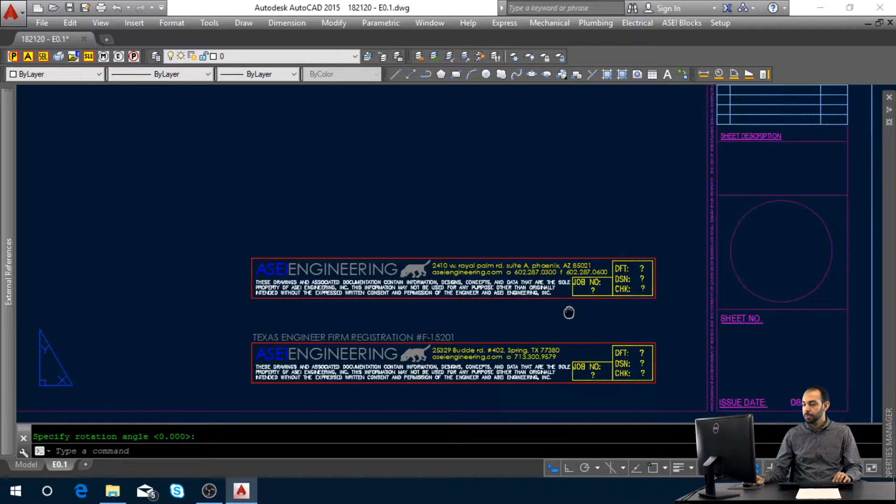Now we're going to bring in our ASEI logo. Come up here to the top, drop downs, title blocks, ASEI sheet logo. For this project, we're going to be using our non-Texas logo. Please be sure to use the one that corresponds to your project. So I'm going to place the logo 0.25 left and 0.25 upwards from this corner.

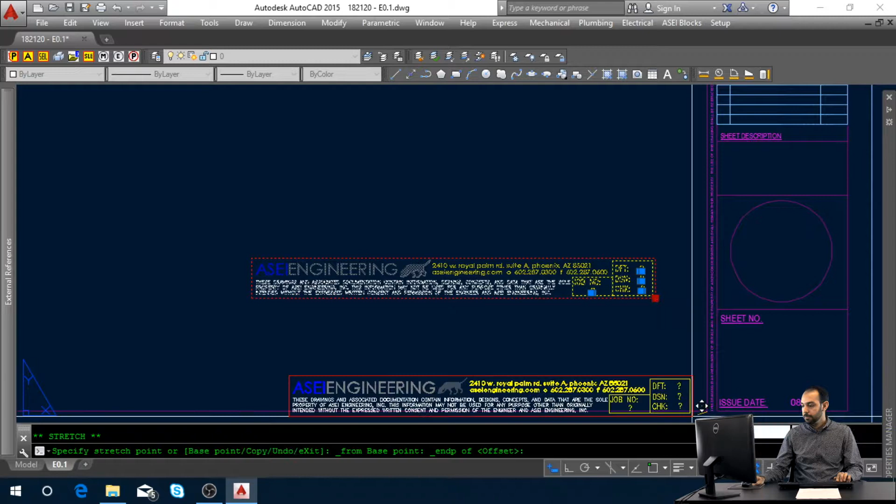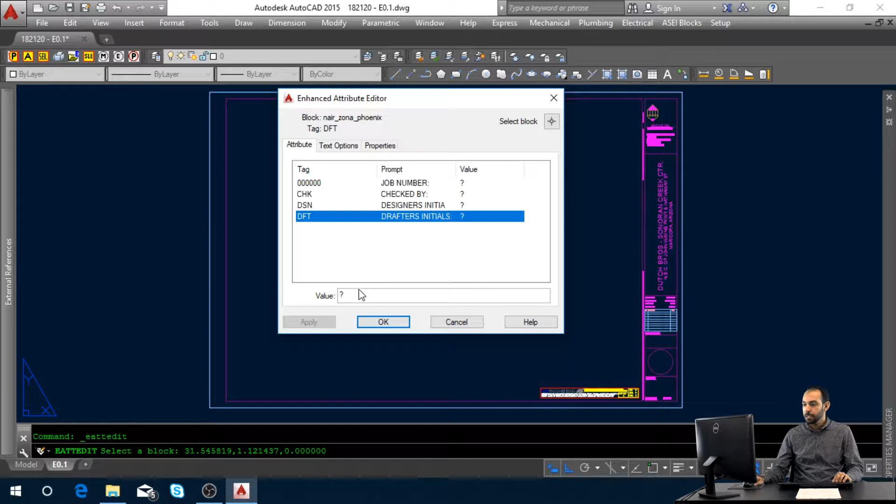Now this is going to stay here on all of your electrical sheets. It's going to be in this exact same corner. So go ahead and fill in your job number. This checked by is going to be the engineer that's reviewing your project. This is the designer that's going to be on this project that you're working with. And this is the drafter's initials, so you can put your initials there.

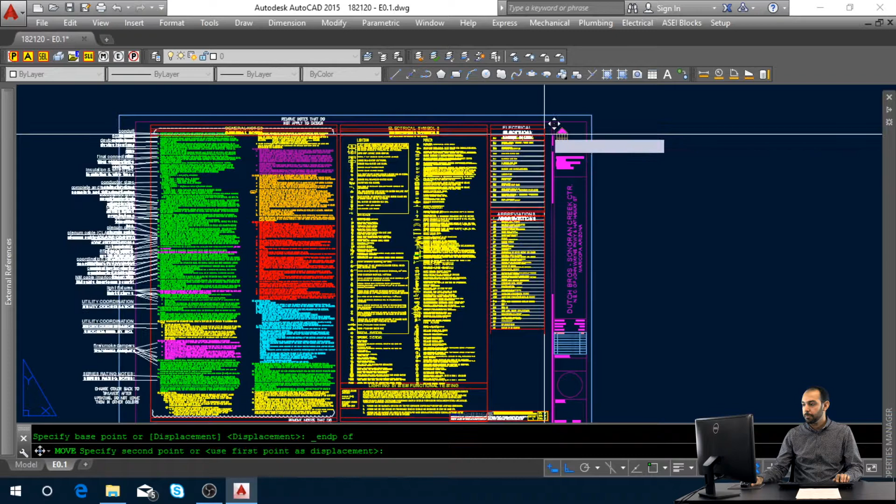For our E0.1 sheet, we want to bring in from our electrical drop down, go to Sheets, Sheet E0.1, and you want to bring this and place it somewhere on the sheet for now. It comes in as a block, so what we want to do first is line it up with our logo. So I'm going to grab this endpoint and then reference off of this corner here, and just slide it up and place it here. This way everything stays lined up and there's no weird shifting lines.

We also want to go ahead and click the block, and if you type in burst, it's going to undo the block, and now you have individual files. You have text here in white, that's in Defpoints. Go ahead and erase all of that that's in Defpoints.

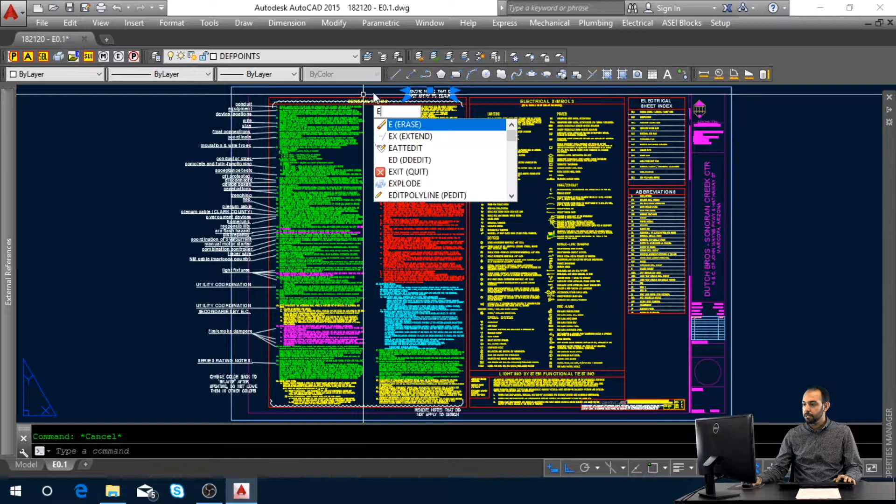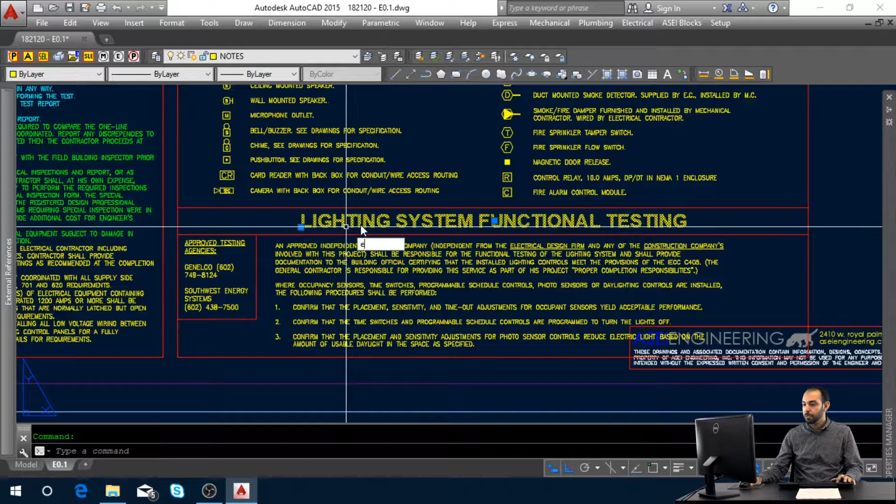These are just notes for you to look at so you know what's going on. What we're going to talk about today is specifically our sheet index and our general notes. We also have the lighting system functional test. For this, we're going to remove it for this project, and if you're not sure whether to keep it or not, please speak with your designer that you are working with on this project for clarification.

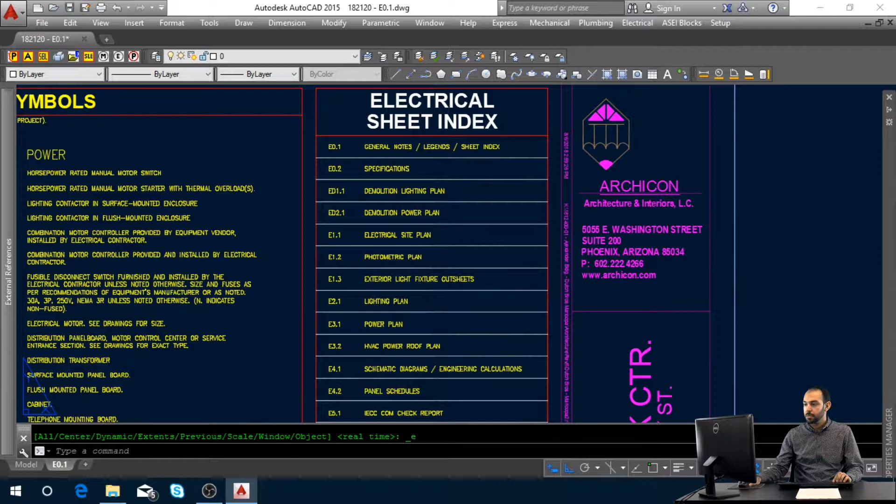I just trimmed those lines. It's good to get a good idea of what the project is and what the scope of work is. This will define which sheets you're going to use. For this project, we will not have any demolition. It's going to be a ground up project. So I'll delete those two, and I'm just going to slide these up.

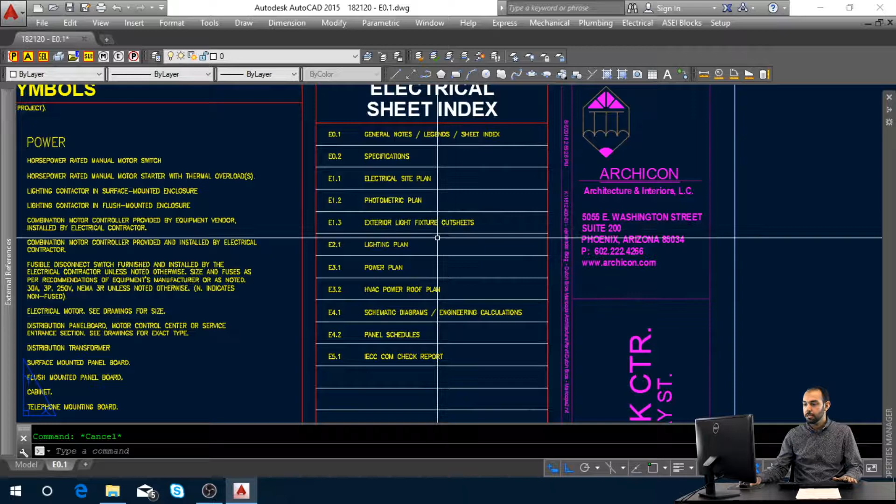Again, if you're not sure which ones to delete or adjust, leave it for now and speak with your designer and they will help you. And last, we'll have this section here. It's multicolored to help you differentiate between the sections that are spoken of in these notes. For now, we're just going to leave it here.

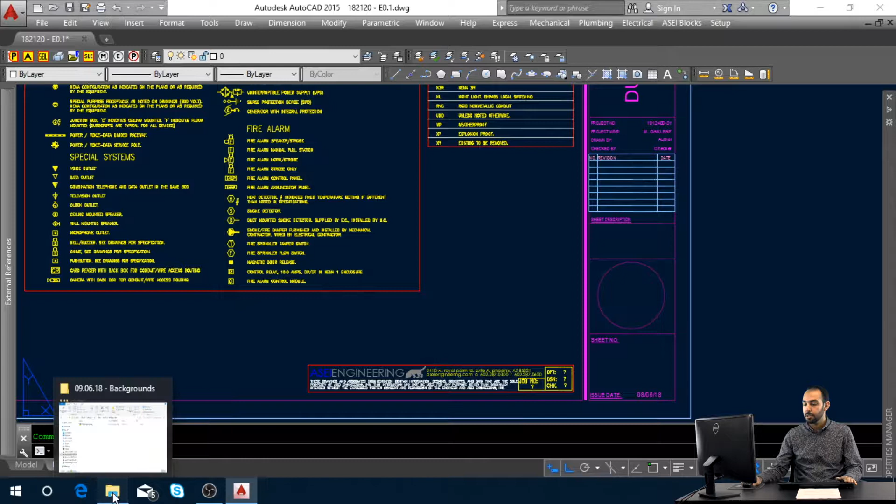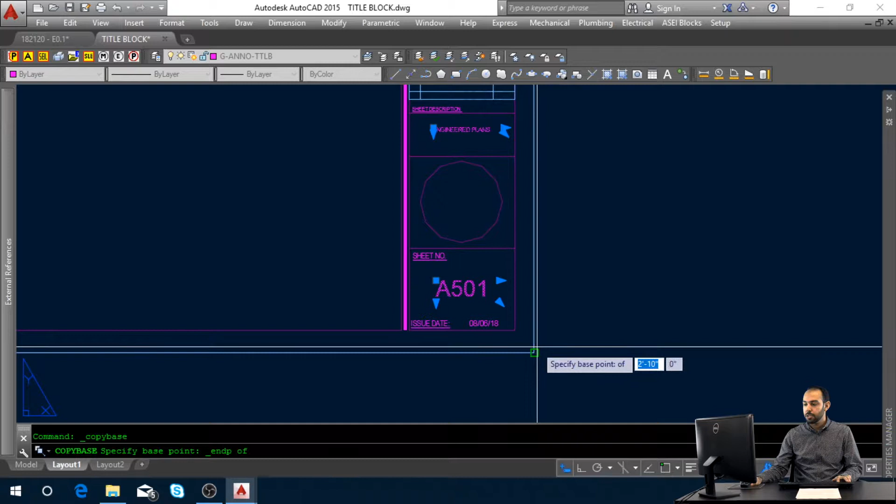Now, if you notice, we need a sheet description and a sheet number to label. So I'm going to go to our job folder. In our A folder of your project, go ahead and open up where you have your title block that the architect sent you. You want to go ahead and select the sheet number, and if you see they have a sheet description. So per architect, this will change slightly in locations, so just please grab it per architect that you're working with.

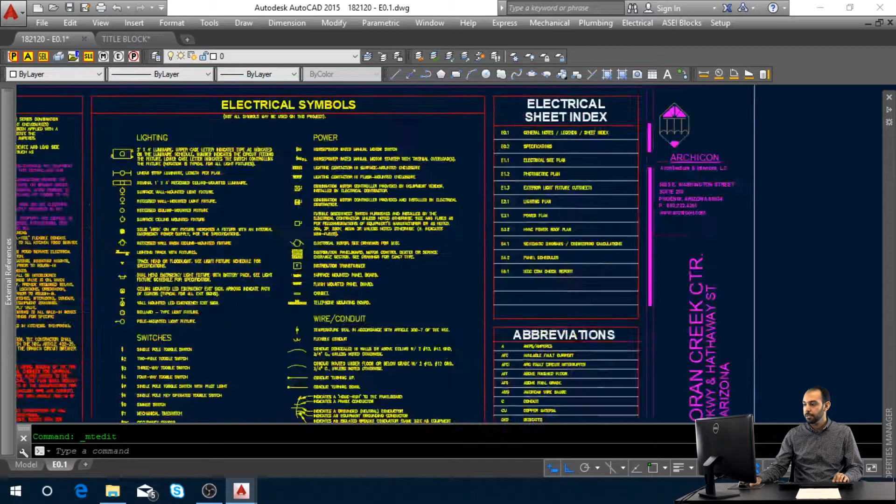And I'm just going to bring it into our sheet, and I'm going to rename it E0.1. And for the sheet name, I'm going to come over here to our sheet index. Here it tells you what sheet you're on and what each sheet name should be. So if you ever have any confusion on what to name the sheet, you can look at the sheet index. I'm going to copy this, come back to our sheet description, and just paste that there. So here you go. Here is our electrical sheet setup for E0.1.

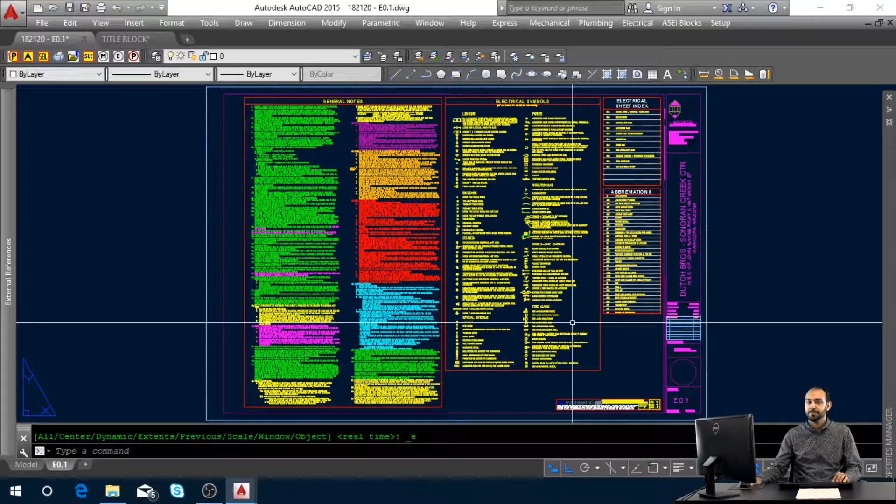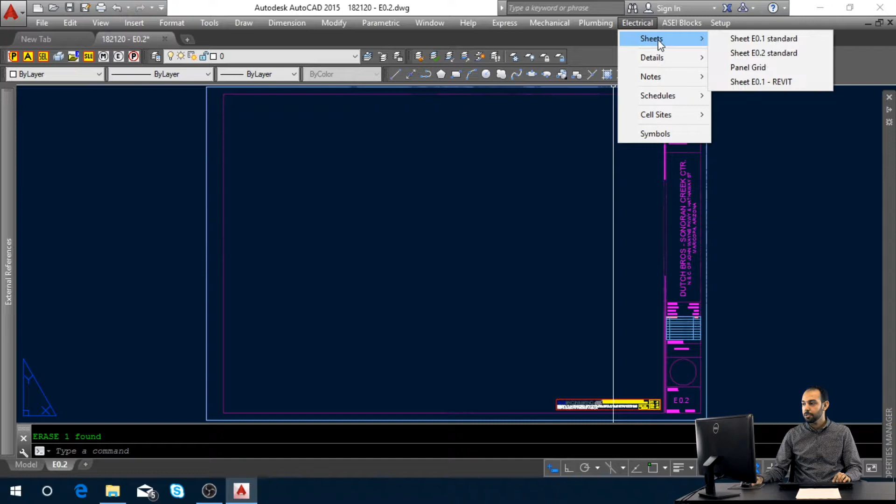So we're going to move on to our E0.2 sheet. We already brought in the title block, our logos, everything's in. We want to go ahead now, and this is for our specifications. So we'll go to electrical at the top in the drop down, go to sheets, E0.2. Now I'm going to click this off to the side for now.

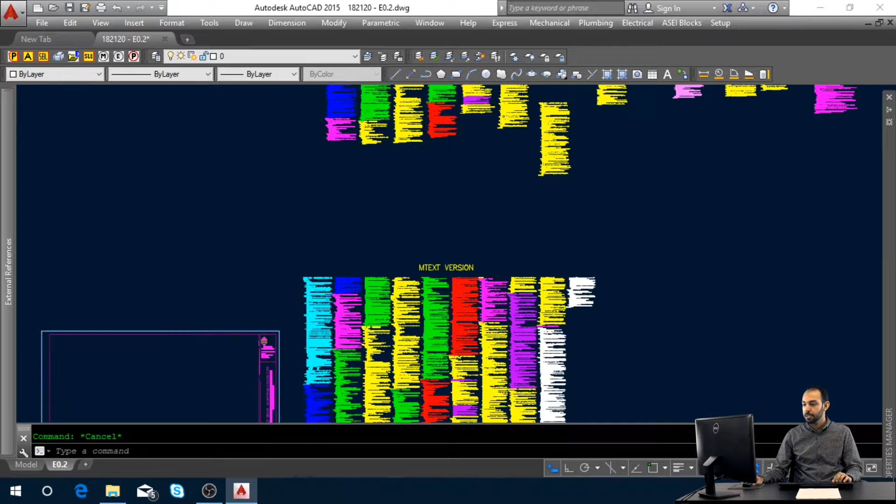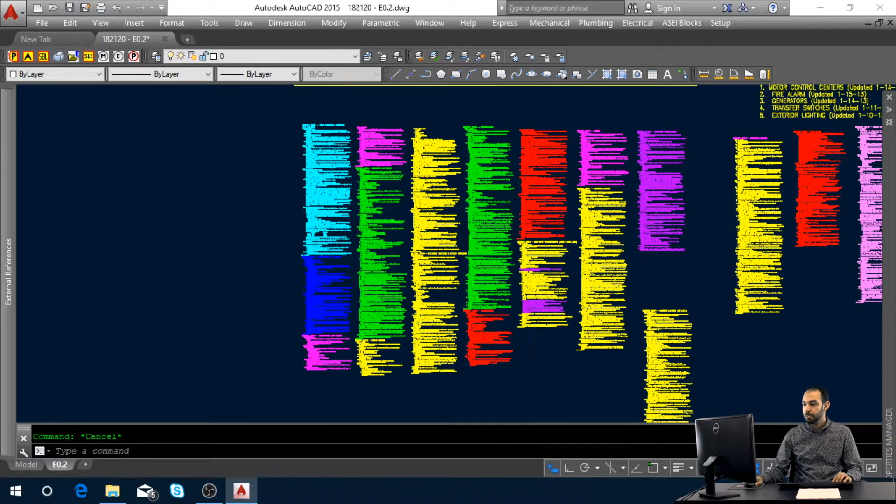So what we have here is our specifications that we use for our company, specifications to the contractor. So we have two options here: a mtext version, and then we have dtext for direct text, which is manual sentences, so everything is separated into its own line. For this project, we're going to work with the mtext.

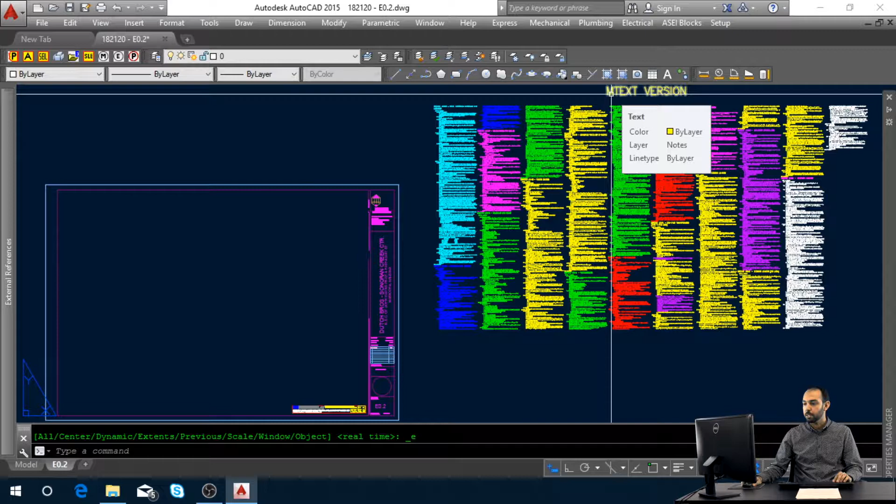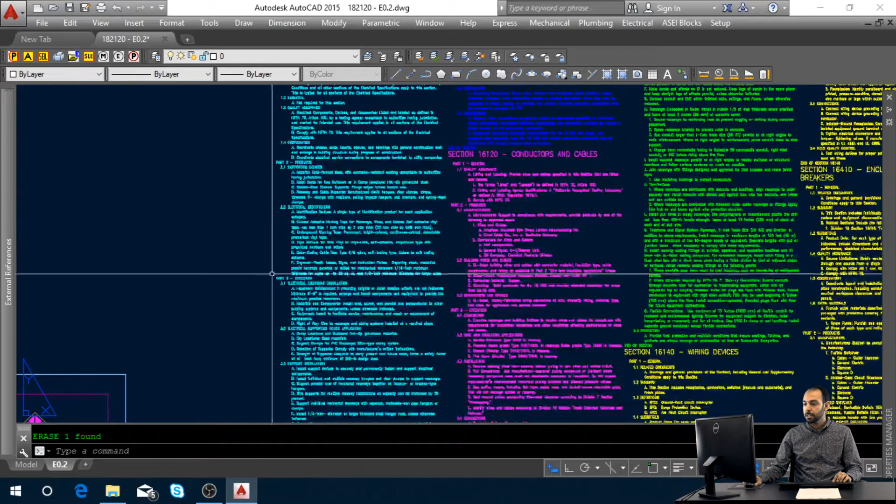Now when you're setting up the projects in regards to the E0.2 sheet, you do not want to copy the AutoCAD file from your E0.1 and reuse it for this sheet. When you do that, the mtext will come in and nothing will be aligned, and all of your items here will be unorganized. So you have to be sure you create a brand new sheet that is straight from AutoCAD. You do not want to copy over anything for this specific sheet.

So I'm going to go ahead and grab it. We're going to move it into our title block. For now, I'm going to place it somewhere where it fits inside. We're going to have to edit this. If you're not sure how to edit these, you can leave it and have your designer help you with clarifying which sections need to go.

Again, we have a multicolored text. This is to help you differentiate between these sections. So we have too much here, it's fitting off of our title block. So what we're going to do is split this between two different sheets.

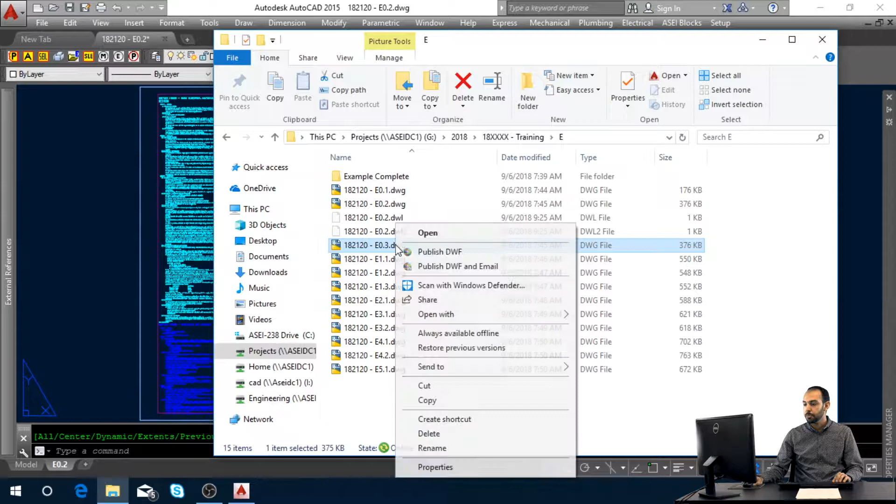So I'm going to go ahead and open up or create a brand new E0.3 sheet. We're going to name it as 0.3. Just jump over to E0.3. And what I'm going to do now is go back here to our E0.2. I'm going to copy with a reference point and bring it over, and I want to place it in the exact same spot.

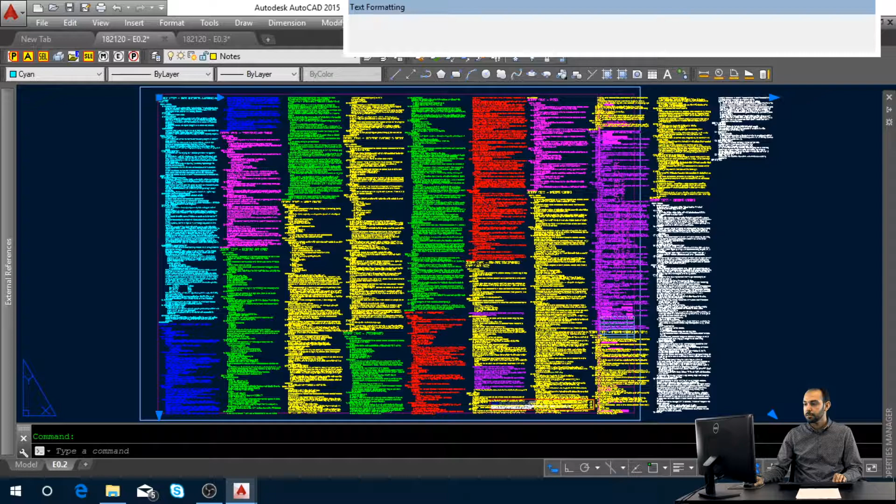So because these sheets were created brand new, when I copied over the text, it stayed aligned. So that can be done. I'm going to go back to E0.2, double click into the mtext, then zoom out a little bit.

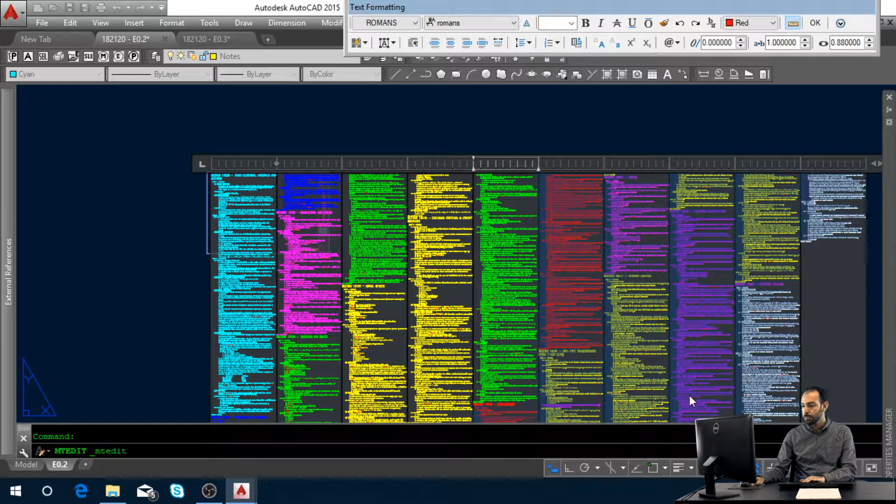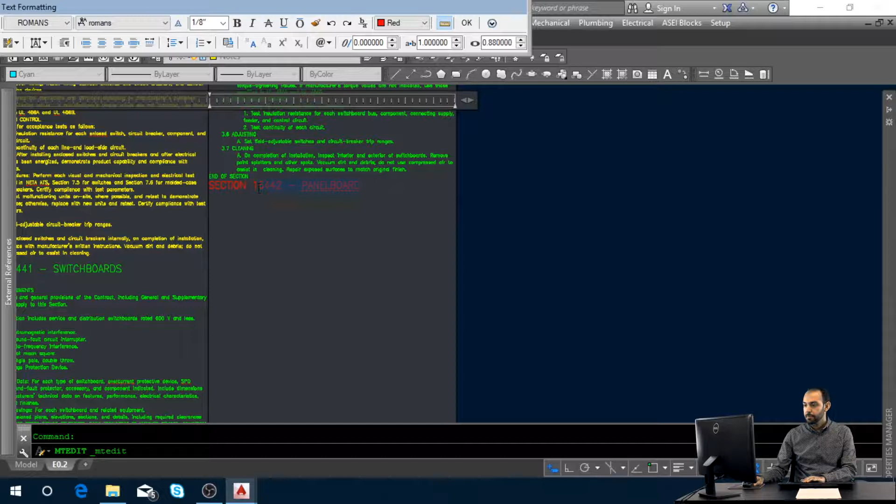And I'm going to get rid of from the red text for here, and we're going to just backspace. And you want to get rid of this last portion here. Now I have a much smaller text to work with. I'm going to slide it over.

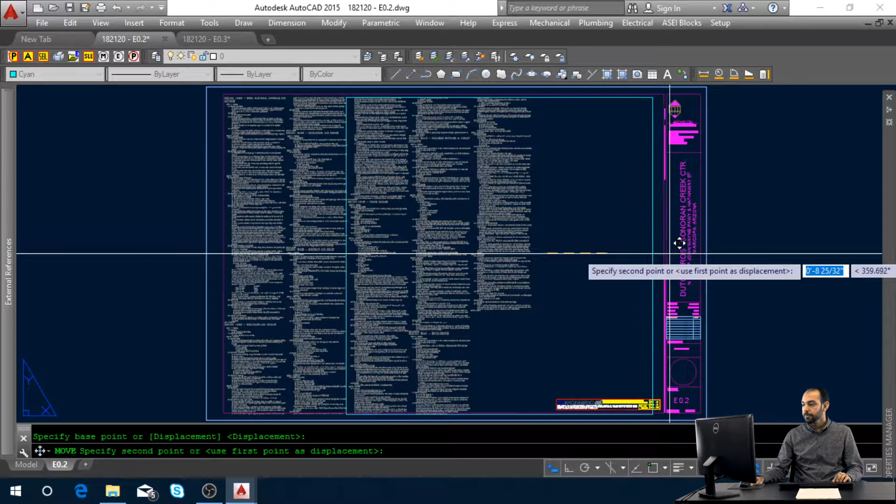And you want to also click on it and move it up so it's not overlapping on your ASEI logo. So I'm going to slide the line above. So now we have what looks like this. And so we'll go to our E0.3 sheet, and everything from that red going forward, we were going to delete that section since we already showed it on our E0.2 sheet.

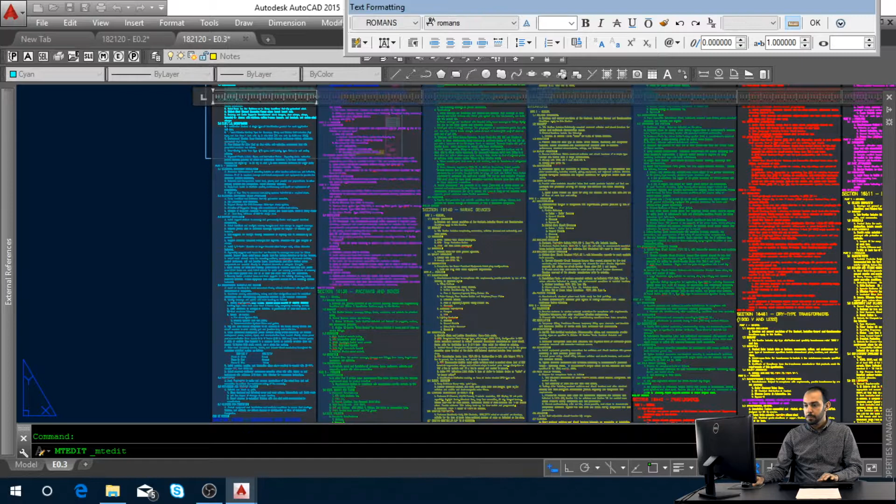So make sure you highlight everything that's in there. And you want to just get rid of all of this other portion.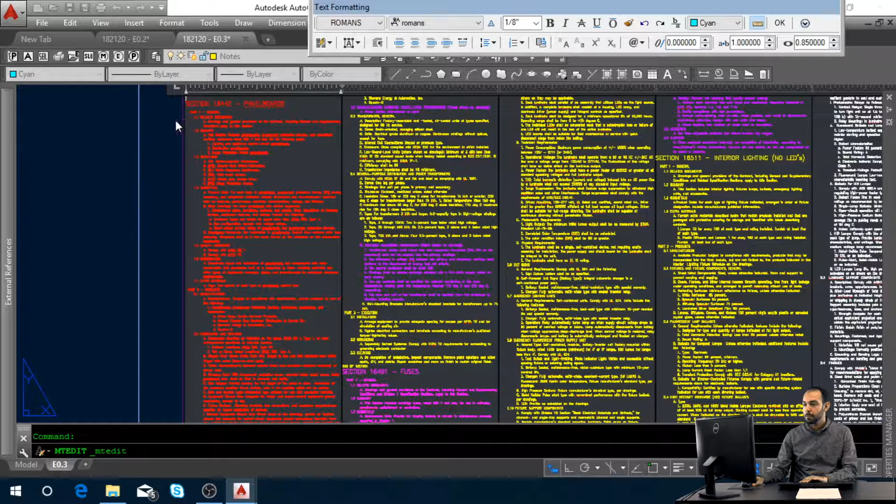Okay, so we're going to slide it over to our right. The reason you want to slide this over to the right and not leave it on the left side of the sheet is because when we submit these sheets to the architect and they print them out, they bind them together, and the binding is on our left side. So we don't want text to be too close over here in case that when they're flipping through the sheets, they don't see the text. So we try to move it over to our right side of the sheet.

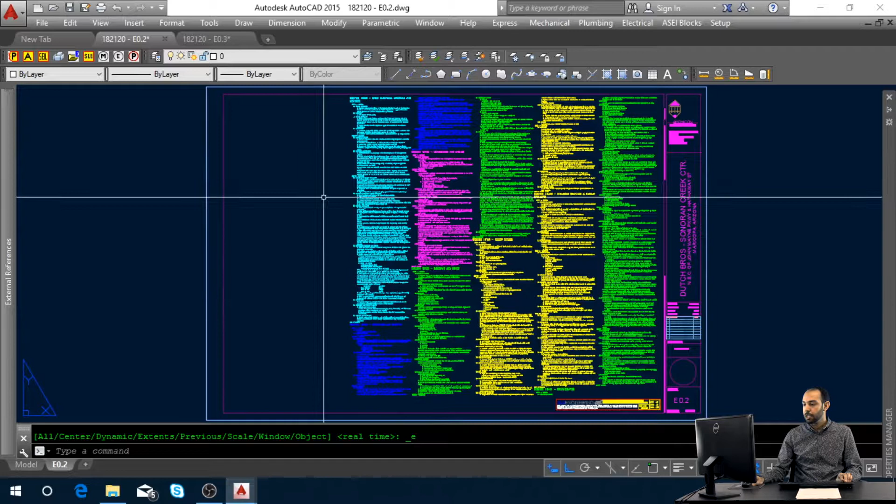So here we go. You can leave it multicolored for now, and when you speak with your designer, you can go over which ones to remove and change it all to yellow when you're done for both of these.

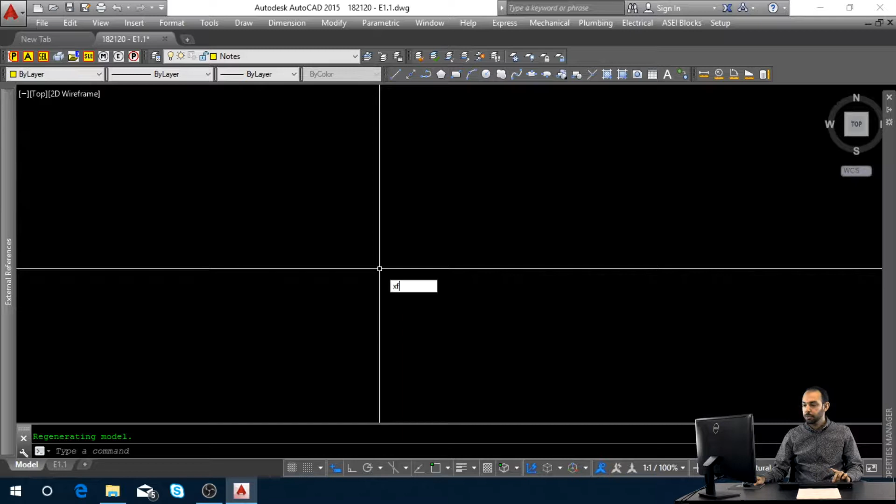So let's move on to our E1.1 sheet for our electrical site plan. Let's go ahead and jump into our model space, and we're going to XREF in our site. Select your site. Make sure it comes in at 1:1. So here we have our site that we're working on.

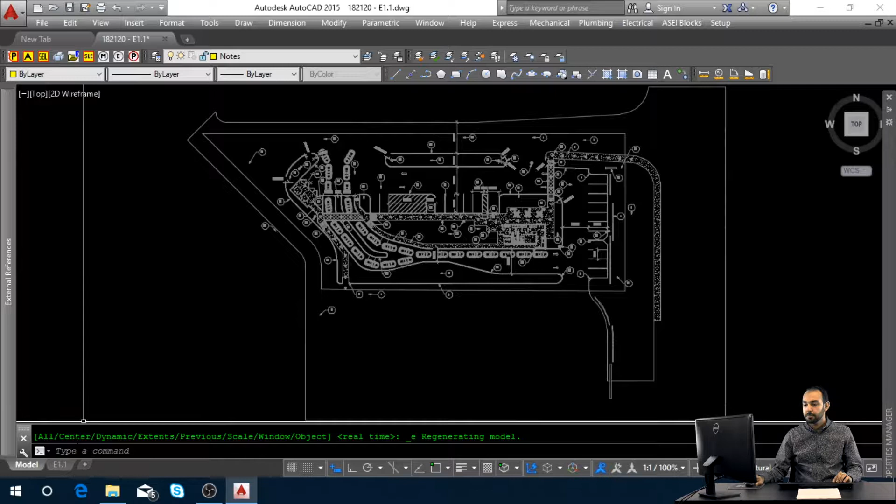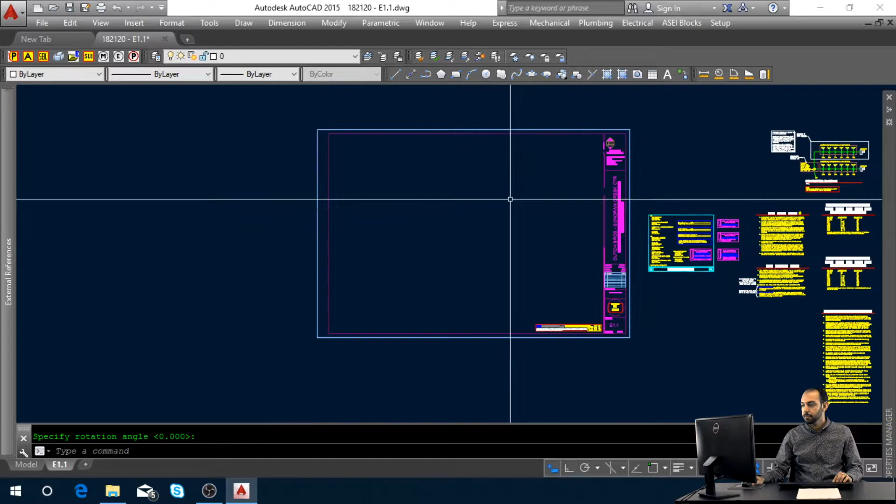Let's go ahead and go back to Paperspace. What we want to do is go to our electrical drop down, and this time we want to come down to our notes. We have a section called Site Plan Notes. Go ahead and bring that in, place that on the side of your title block. This will come in as a block, so go ahead and just burst the block so you can access individually the items.

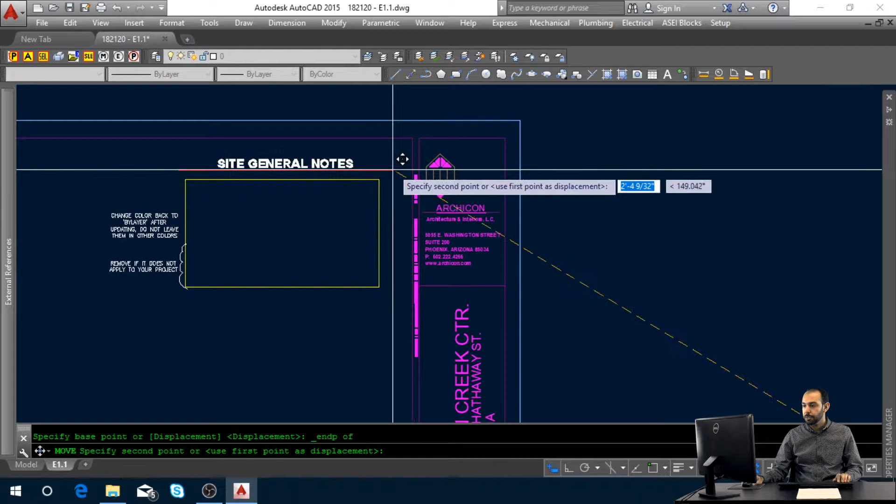And we're going to grab two items here: our site general notes and our site key notes. These two are going to be very important where you place them at first. So I'm going to place it here, and I'm going to grab my site key notes, and I'm going to move it, and I want this to align perfectly with my site general notes. So I'm going to bring it from this corner and slide it down here. These two are going to match every single other E sheet where you're going to use them.

You may want to make sure that these are the exact same locations. This one might change a little up and down, but they're going to be in this area. So that's going to be on every sheet.

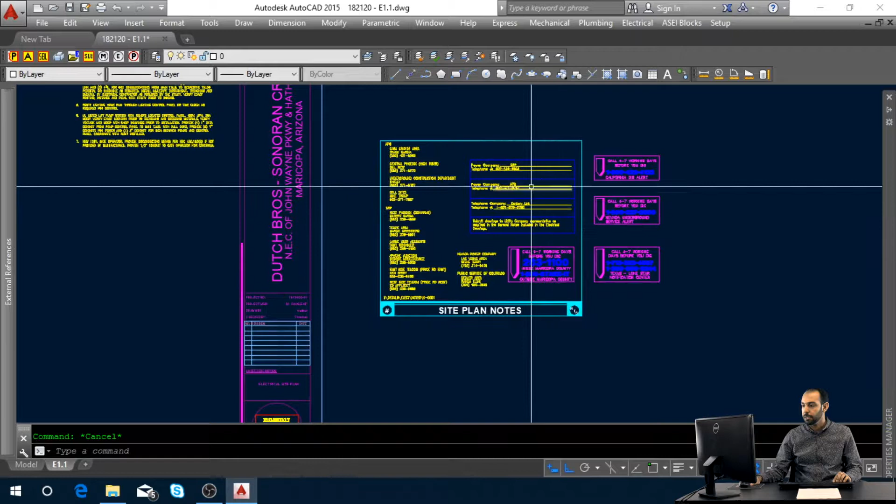Next, we want to bring in our utility note, this blue box here. The purpose of this is to let the reviewers know who the utility company is. I'm going to bring this in and line it up to the corner of my logo, and move it up 0.25. You can leave that there for now.

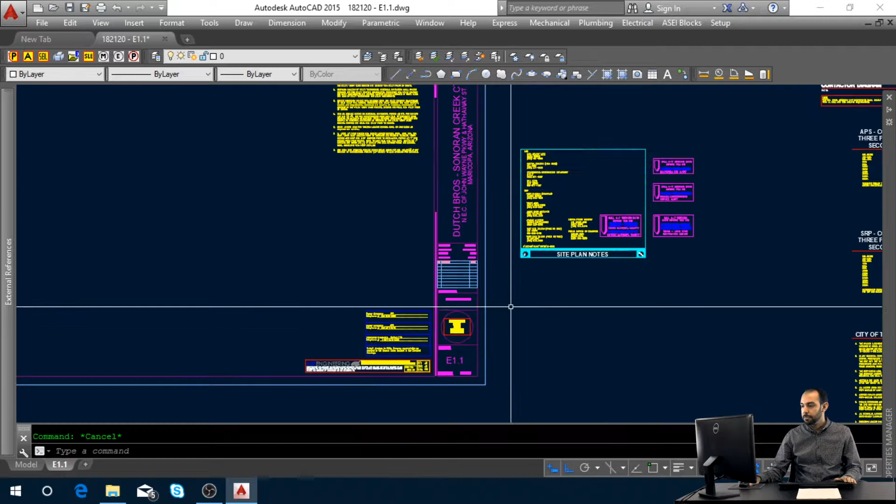Depending on the city that you're in, you want to go ahead and select your dig note. This lets the contractors call to make sure there's nothing underground. So I'm going to move that over from the corner of our utility note, again 0.25, so everything lines up and looks neat.

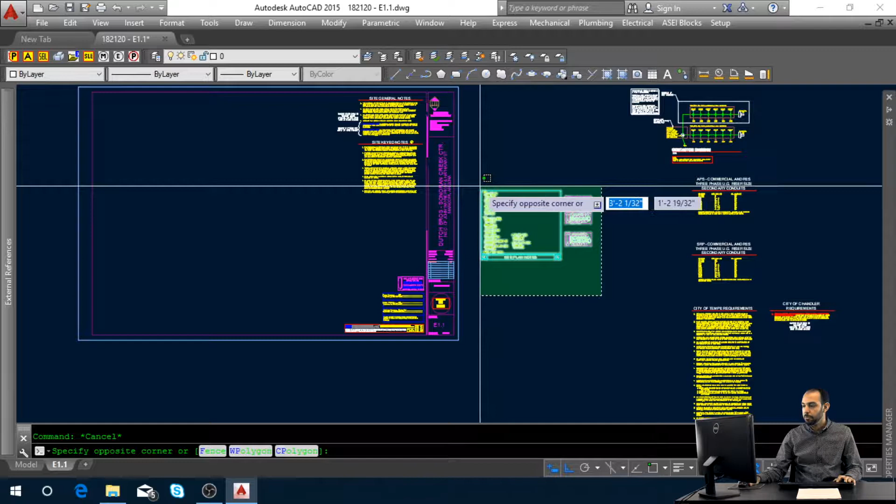You can go ahead and remove what's left of your utility note. If you're not sure which one to pick, go ahead and speak with your designer on that. Depending on the location of your project, these notes are here for your reference. Since we're not in these sections, we're going to just remove those, and I'll go ahead and remove these other ones. Again, if you're not sure, you can leave that on the side of your sheet.

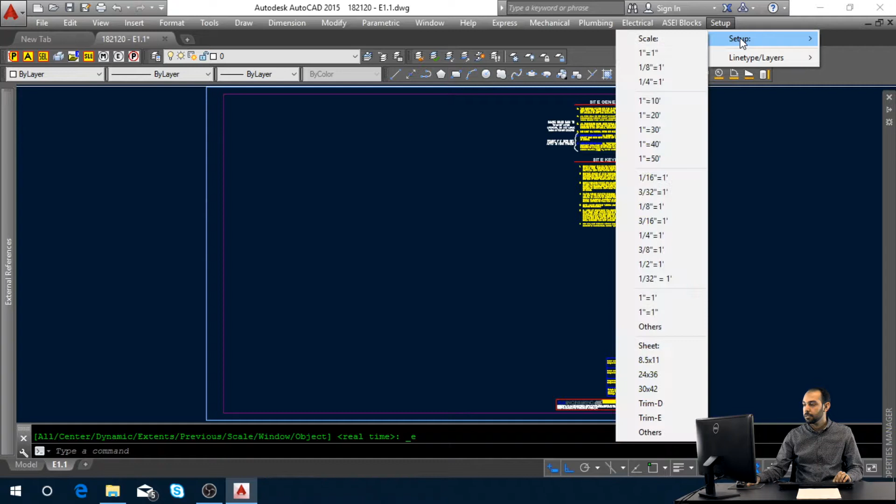So next, I want to go ahead and bring in my viewport so we can see the site. I'm going to bring in, up here at setup, certain layers. I want to bring in general.

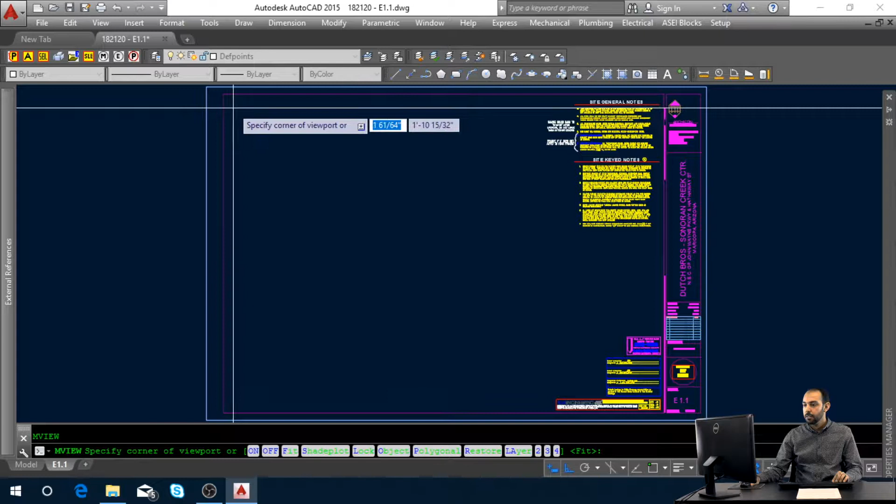And so you should have a Defpoints layer. You want to be on that layer. Make sure you're on that layer. Let's MV for multi-view. Go ahead and click, and then click. So you have your site.

When you go in, make sure you select your scale. The scale you want to use is dependent on the scale the architect is using. So I went ahead and typed in our scale, and that's going to be the one that matches the architect. If you're not clear, you can look in your A folder.

There should be a PDF from the architect showing which one. So I want to bring in a plan title. I'm going to go into the ASEI blocks, go to blocks. You want to bring in a new plan title with the north arrow. Select that, bring that in, center it to your viewport.

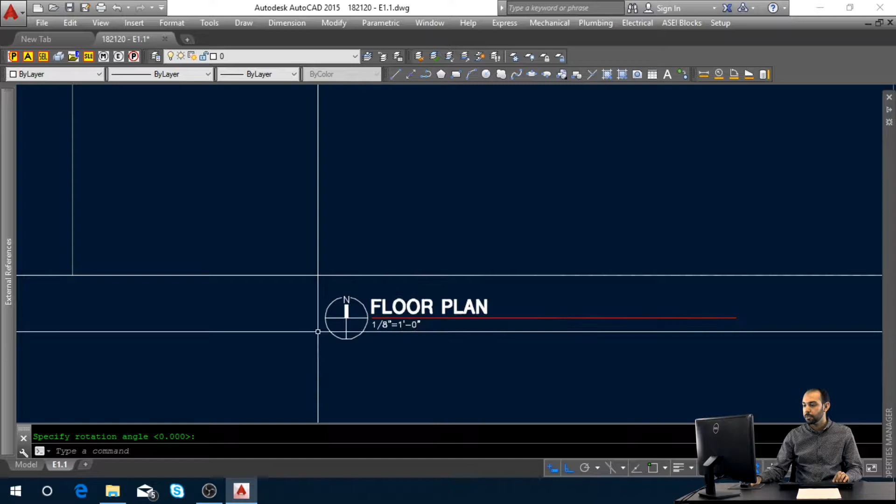You want to verify your north arrow. You can look at Google Maps, look at the address, and see the rotation of your building to make sure that it's facing north.

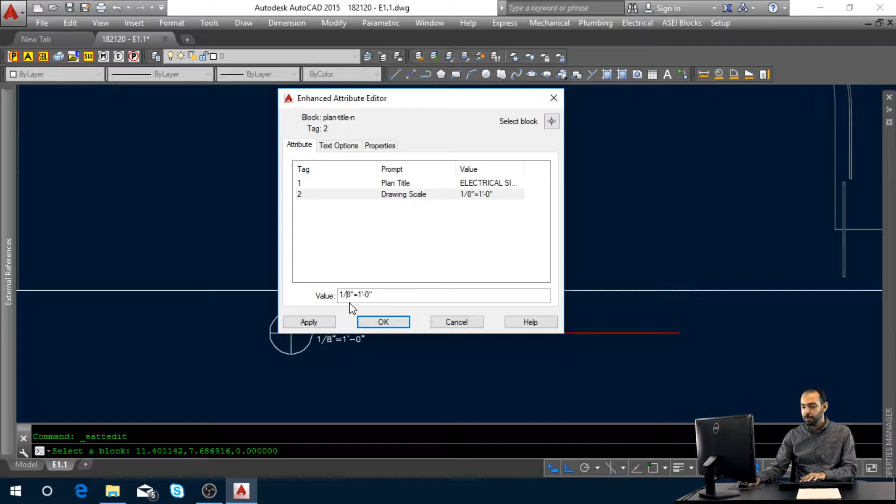Now we're going to name our sheet. This is our electrical site plan. Make sure all your text is in caps. Your scale, again, you can verify on the architect sheets. This one is going to be 1:20.

And so I have this here. A few more items before we edit the background. We're going to go into our electrical again, go down to details. You can bring in a pole mounted fixtures. You'll have these schedules, details come down. You want to look at them.

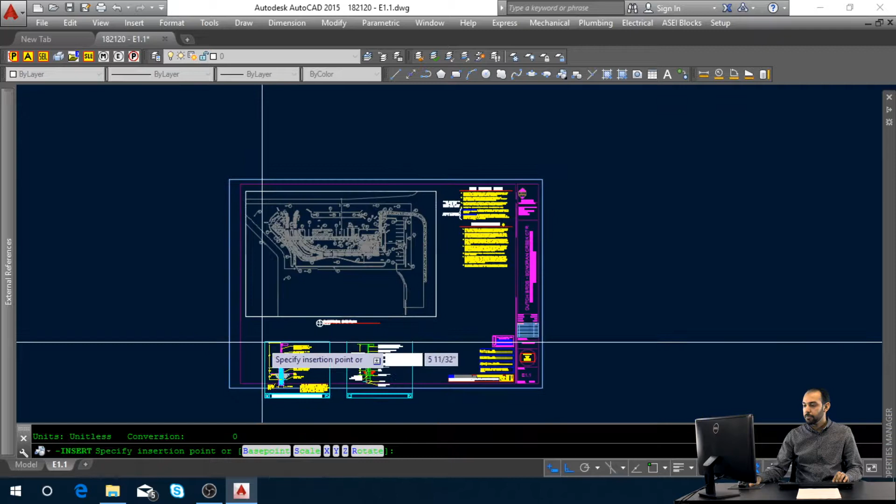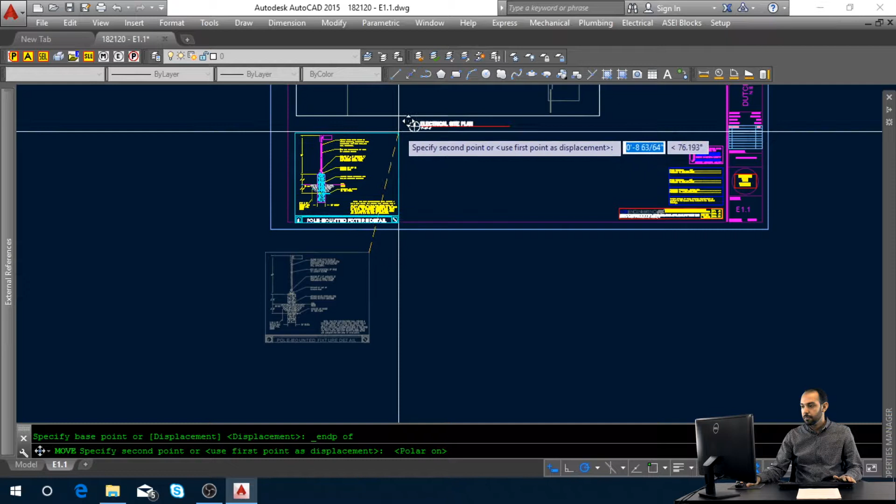They come in as a block, so go ahead and burst it. For this one, I'm going to use our purple or magenta, and you want to place that over here.

Another one is a detail for a trench. This is where the utility is going to be trenching in. We want to show a detail for that. It comes in as a block, so go ahead and burst it.

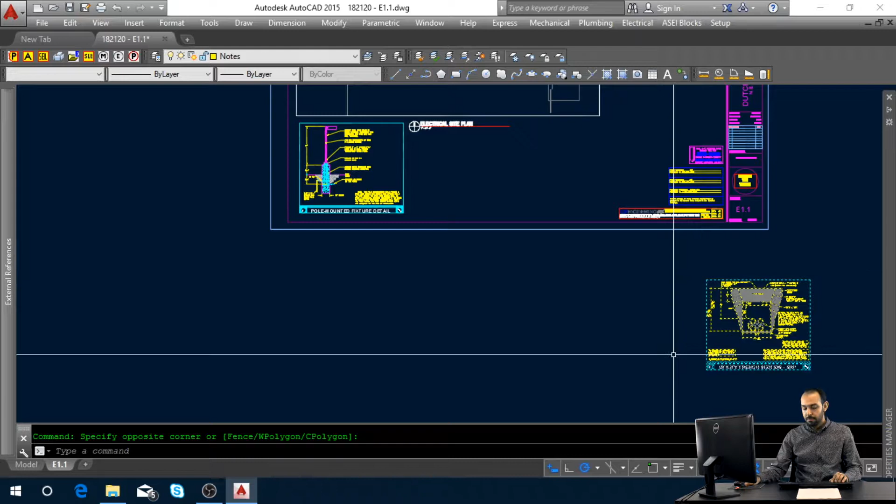You're going to want to see who your utility company is, so we have different details. For this one, it will be with SRP. I'm going to move it from this corner and line it up with my other detail, moving it over 0.25 again.

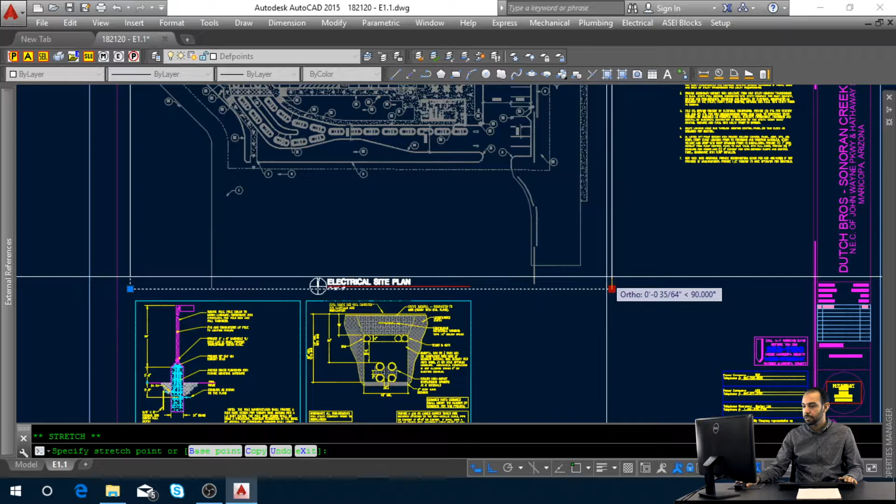I'm going to slide my plan title up, and I can pull in my viewport just a little bit over so it's not overlapping. You want to line up your details to your logo so everything's lined up.

So this should be on your paper space. You should look at this for now, it should look about this. Let's go to model space, we're going to make a few edits here.

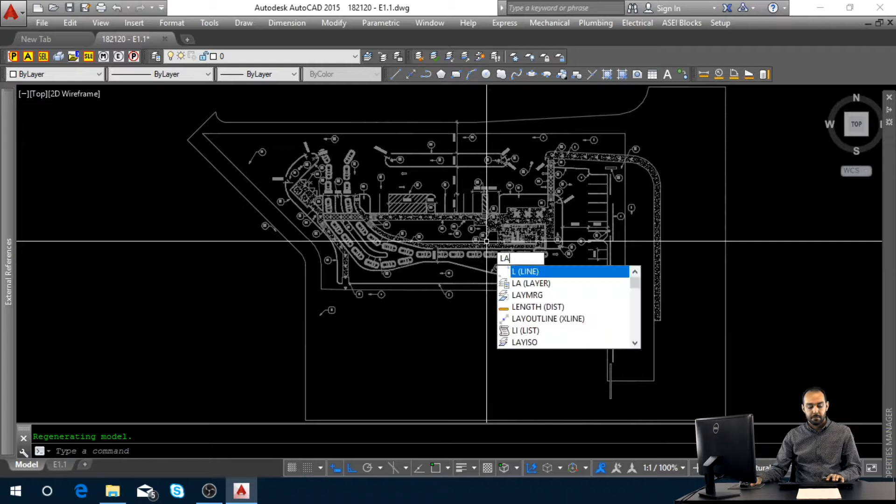So you want to be sure to get rid of dimensions that the architect sends over in the background. You can just freeze that. We'll freeze these tags. And so we have this right here.

So we have our site, there's parking lots, our building is over here, there's seating here. This reference for the cars, that's your driveway. So we're going to leave it like this for now. And so here we go. This is our sheet setup for E 1.1.

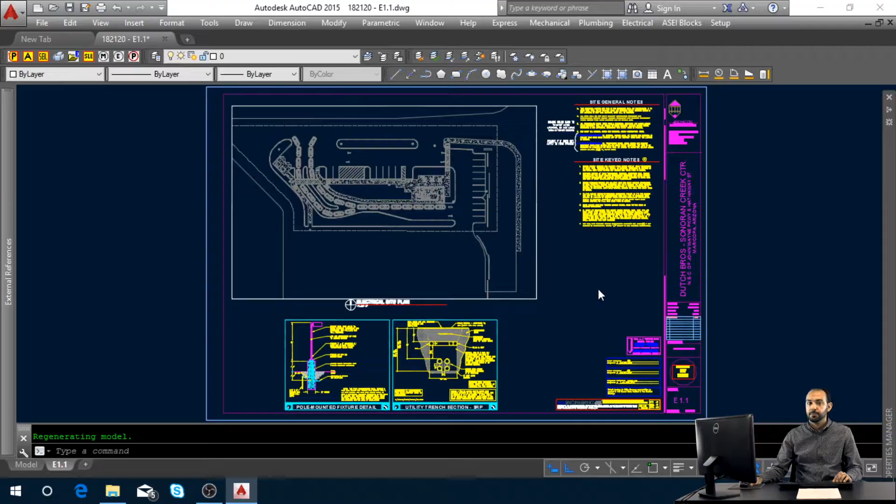Okay, so we're gonna start with our photometric plan. That's our E 1.2 sheet. So let's go to our model space.

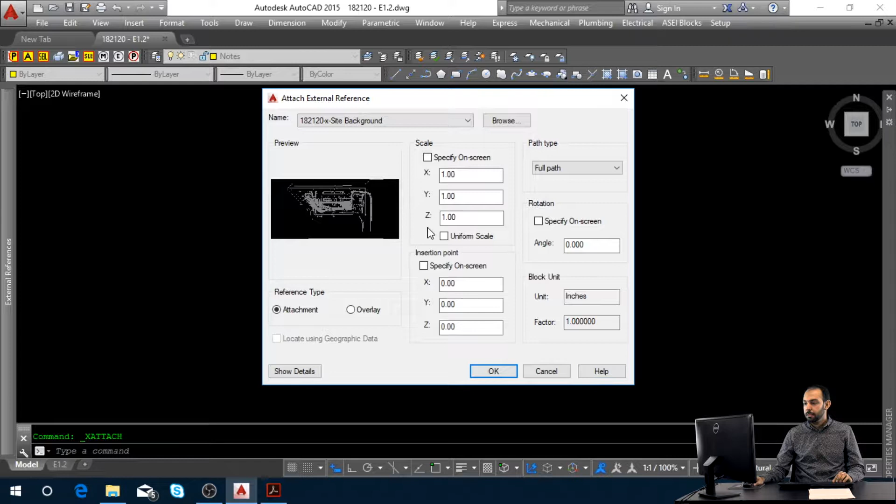And we're going to xref in our site plan, and you want to use the same one you used for your electrical site plan. Make sure your scales are at 1:1. Hit OK.

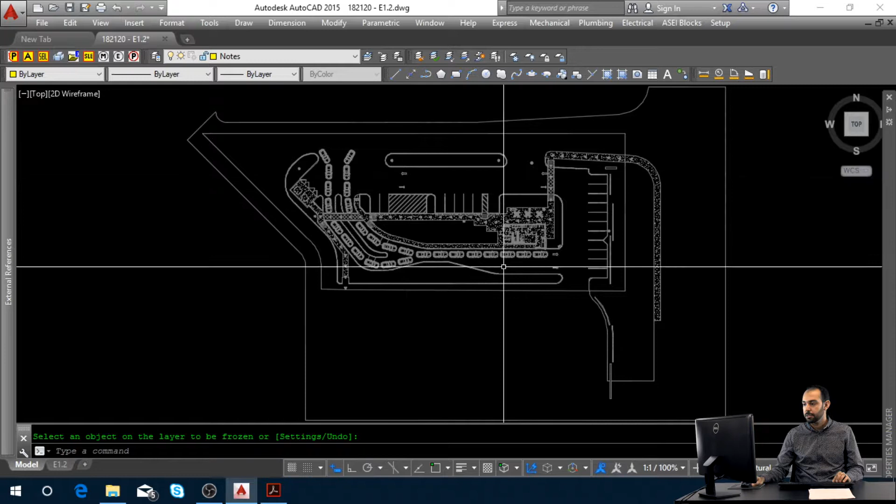And I'm going to zoom extents, and this is asking if you want to regen. Let's hit OK. And you want to freeze the same layers you froze for your electrical site plan. Dimension going to go, keynotes are there, going to go, the little tags.

And now we're going to go back to our paper space. You want to be sure you're on your Defpoints layer. And now we're going to create our viewport.

So I'm making my viewport here. It's going to ask me if I want to auto regen. You want to hit OK. If you hit cancel, it won't regen.

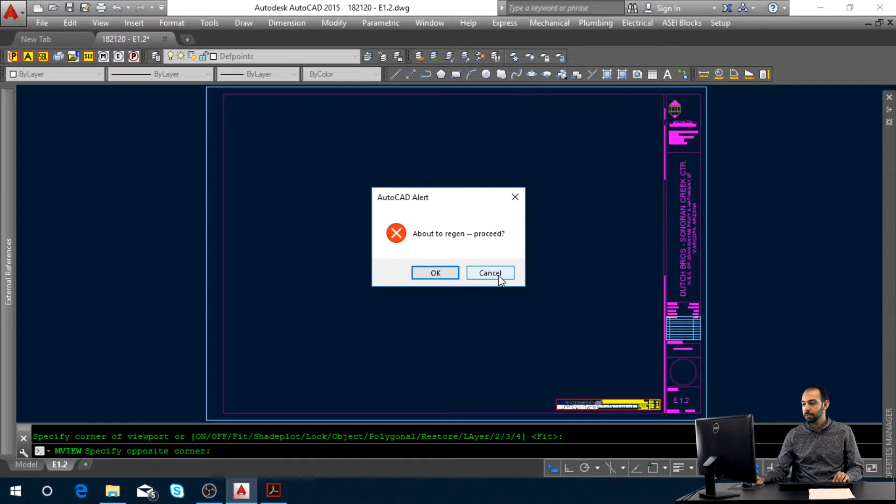And if you double click in it, it won't let you go into your viewport into model space. So let's try that again. This time we're going to hit the OK for auto regen.

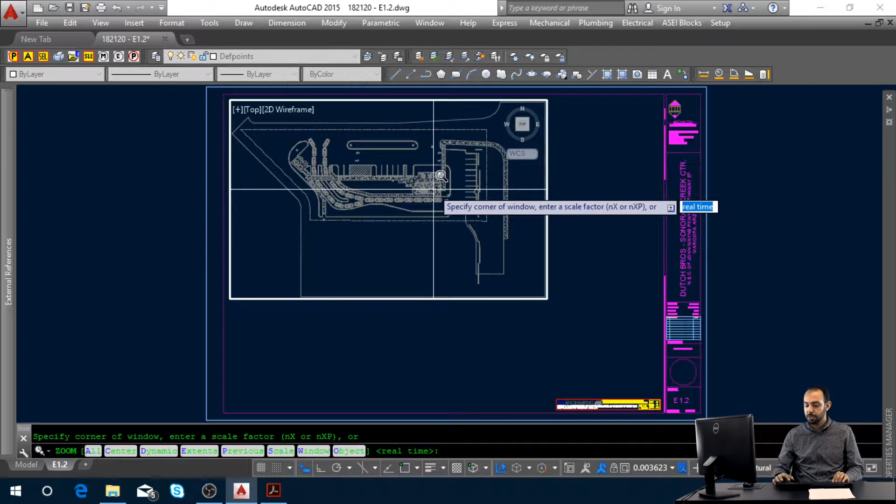So now our viewport works. Everything came in. Let's double click into viewport. You want to make sure your scale is the same as your site plan.

We're going to go to our ASEI blocks again, new plan title with your north arrow, bring that in. Double click. Let's change this to photometric plan. And the scale is going to be the same as your site plan.

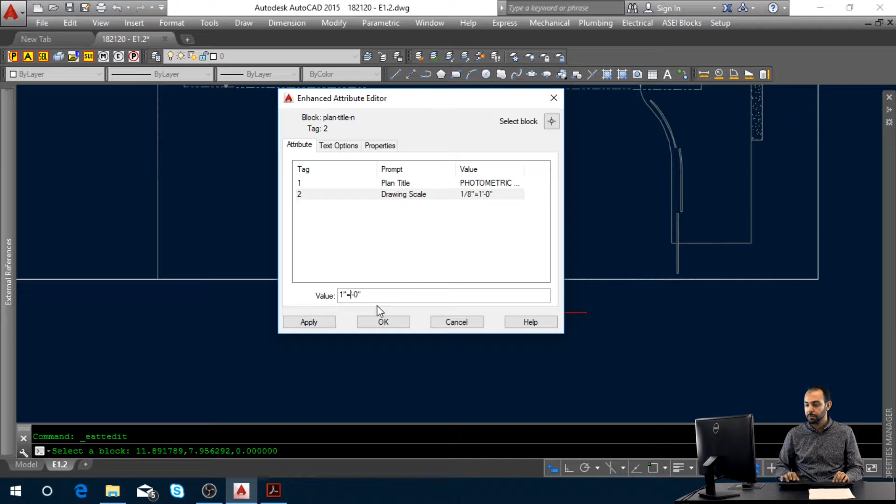So for now, you're going to leave it like this. The purpose of the photometric plan is to show the foot candles that are in your site for the light poles that are going to be there. So I'm going to show you what one looks like completed.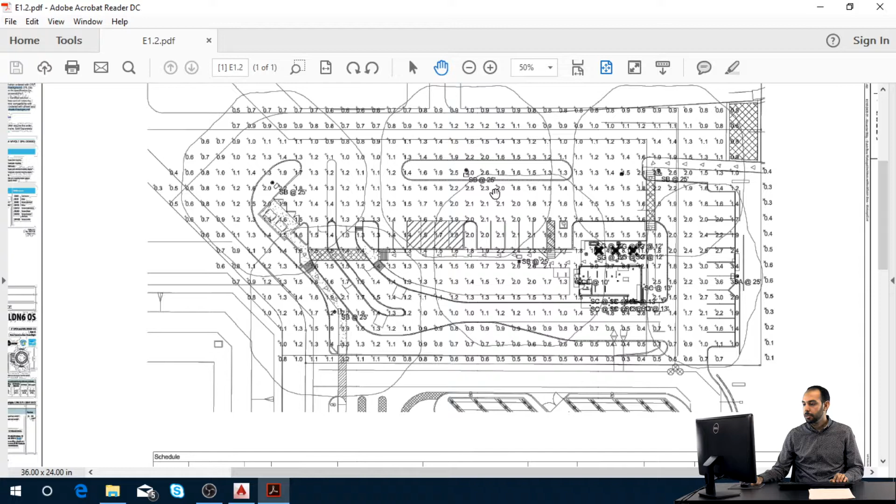These are the foot candles at every spot around the parking lot. And so they'll send this over to you. You'll reset up the sheet with this information on it.

So for now though, we're going to go ahead and leave our sheet looking like this, and your designer should be able to help you send it over to the lighting reps. And this is all you need to do for your photometric plan for the setup.

Okay, so we're going to jump over to our E 1.3 sheet, and this is for our exterior light fixture cut sheets. Now, if your project warrants to add the exterior light fixture cut sheets, you want to go ahead and create a sheet, E 1.3, and for now, we're going to leave it blank.

And what's going to happen here is the lights that you're going to be placing outside, you're going to want to show those cut sheets on here.

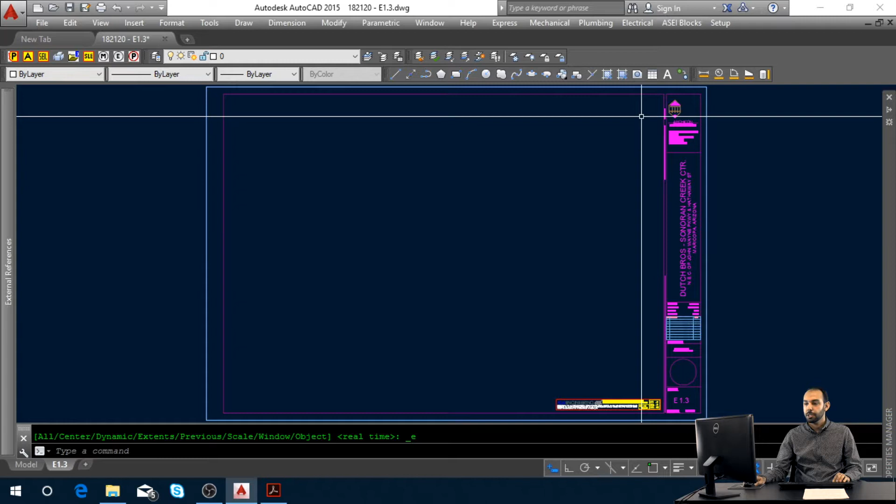And I can show you what one looks like when it's completed. And so what we will do is bring in your PDFs of the light fixtures, and you're going to drop them in, line them up like so.

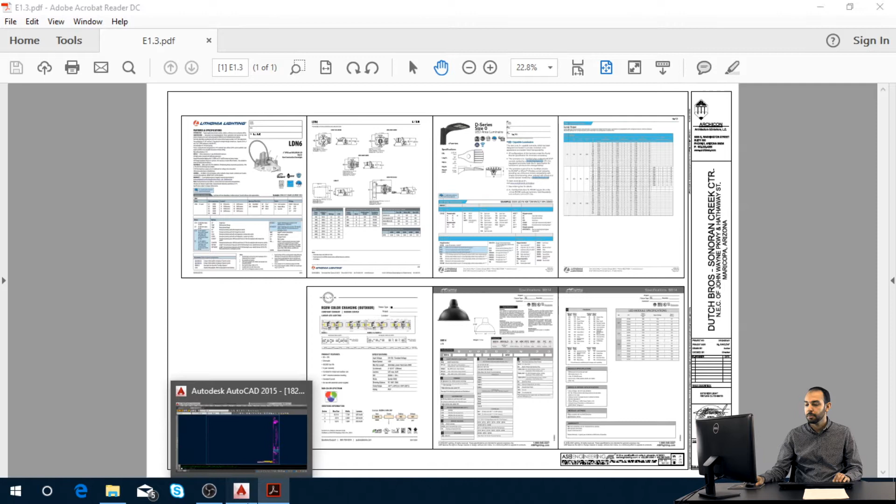So if you want to follow along, I can show you real quick how to bring one in the future. Again, for now, because you're setting it up, you won't have anything.

And the reason for that is we're just starting the project, and you need to speak with the lighting reps for the pole locations or with your designer, and they will help you go to a website and download those cut sheets. And you want to save them in your project folder, in your E folder under light fixture cut sheets. You can make a folder, name that.

And this is where you'll download all of your PDFs. So if you want to follow along with us, you can grab the DSX0. This is our pole fixture.

So all we're going to do again is just drag and drop over. It's going to ask you what page you want to bring in. You want to bring in your first page. And you're just going to line it up here.

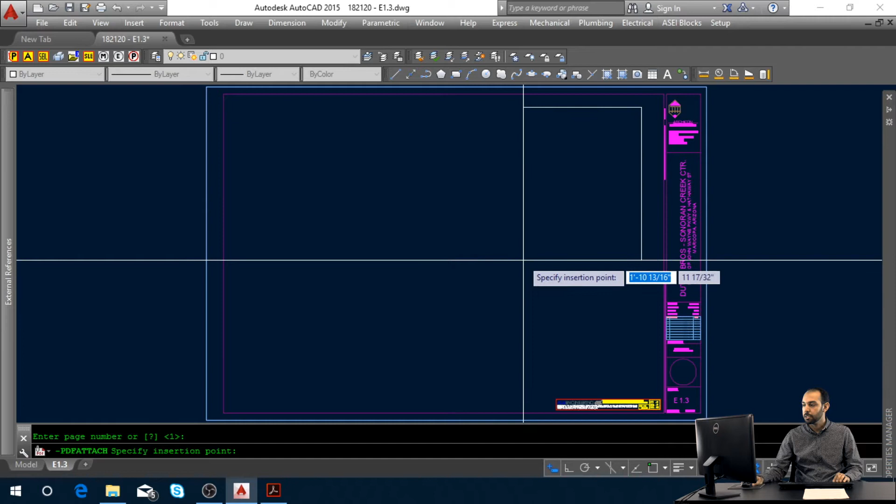Scale, just bring them in at 1:1, rotation at 0. And so you can see I brought in this fixture, and this is our pole fixture. And then what I want to do is label the fixture it is.

So I'm under type section, you want to go ahead and click, and we're going to put in SA/SB, and that will be because for this project, this is what we labeled our poles.

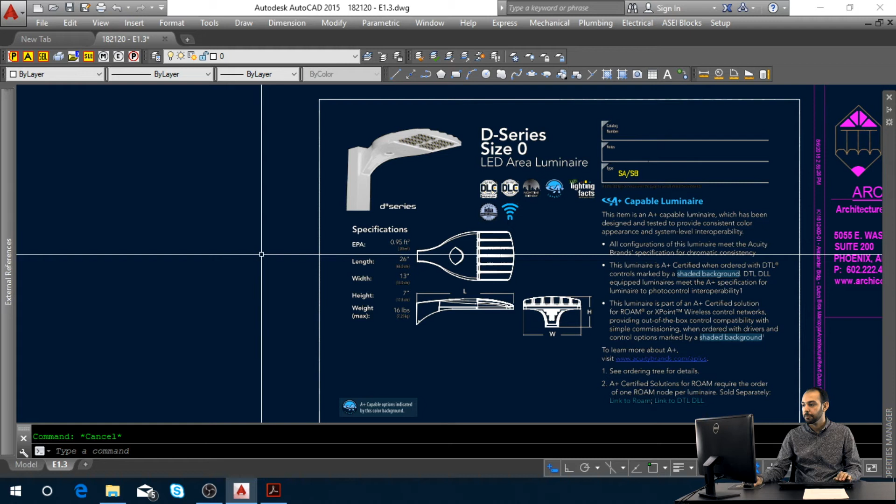And so you want to speak with your designer to make sure you put the right identification of the pole there. And so you can go ahead and bring in your other sheets for all your other poles or exterior fixtures, building lights. And if you run out of space, what you can do is create an E1.4 sheet and add some extra ones that you need there.

So again, for now, you'll have a blank sheet, but for future reference, when you do bring one in, you'll do one like so. And so that's all we need to do today for our E1.3 sheet.